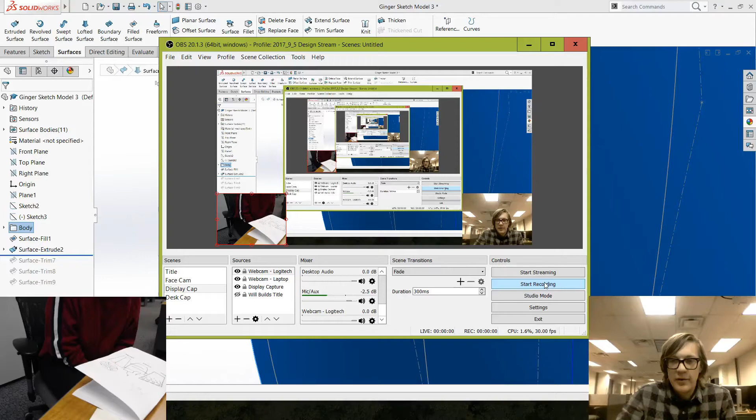So what we're doing is we have cuts, and we want to actually make them protrude from the surface of this thing instead.

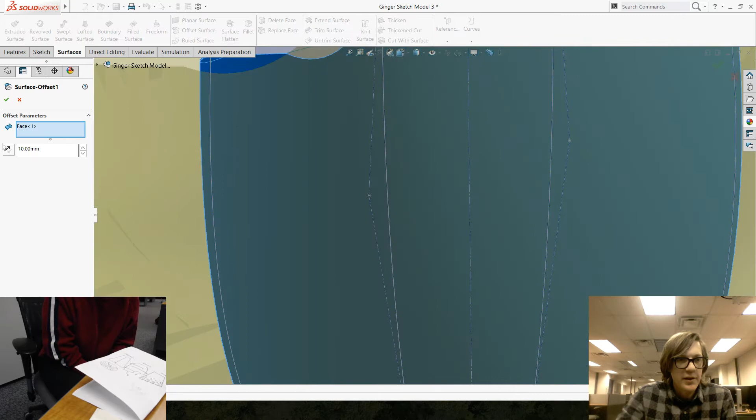One way that we can do that is before we do our trimming, I'm going to offset the surface like a millimeter. Nope, like maybe even 0.5 millimeters.

You do all of your trims, and then I'm going to use those same sketches, which are somewhere. Where are the sketches for these? They might be in the body or something. I don't know, oh wait, yeah I think they are, I think they popped up. Yeah, they're here.

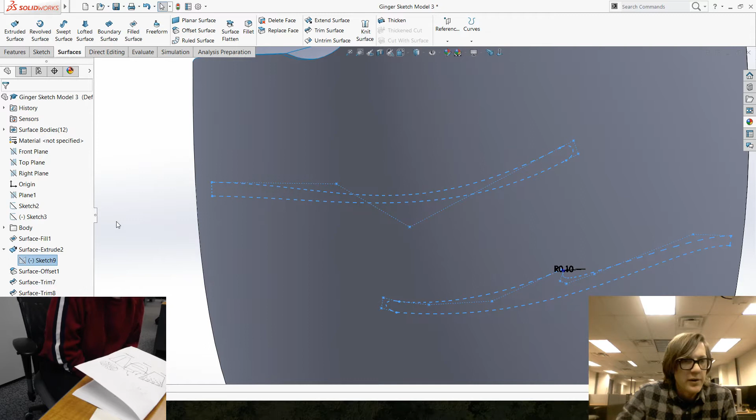I'm going to use these same sketches to trim this, and I'm going to get rid of these. So now I have a gap here, see?

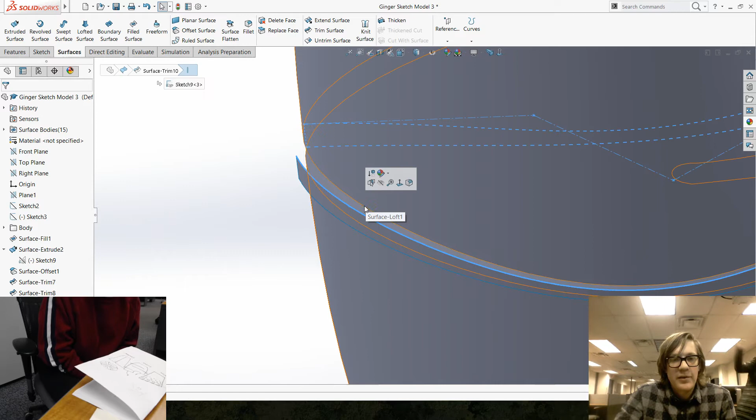I should be able to, well I guess you'll have to mirror this over. You should be able to then loft that profile to this profile. Yeah, and then you have an edge that you can just fillet, and it would look fine.

And actually these are small enough that you might not even have to fillet them at all. So that's one way to do that.

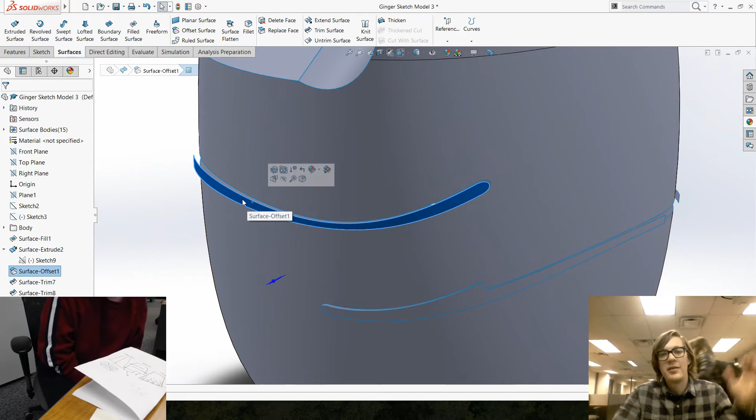The other thing you could do is, instead of trimming this surface, only offset it and trim these, and then thicken this surface back into your other one, and it would intersect. So you got two ways to do that.

To make this less rigid, probably I would just fillet it. The thing that's going to fail on your fillet is this corner right here.

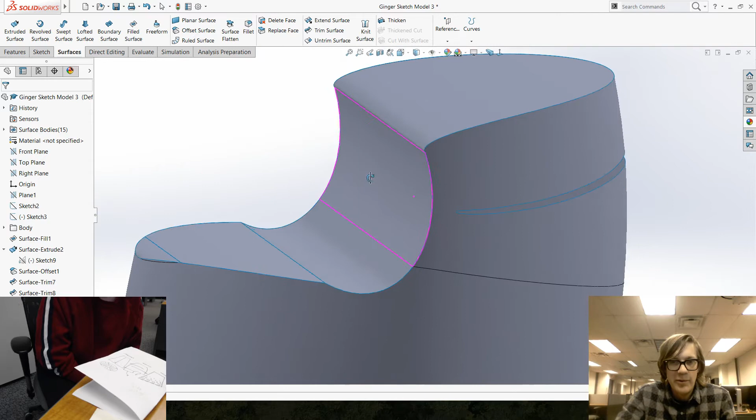So probably what I would do in your trim sketch from this dimension is just make this a sharp corner, and then fillet that. Gotcha, after you do the fillet around the outside. Yeah, I would just fillet those.

And then for, I guess the other one that I have a question on would be, I have questions for all, but I guess orange would be next.

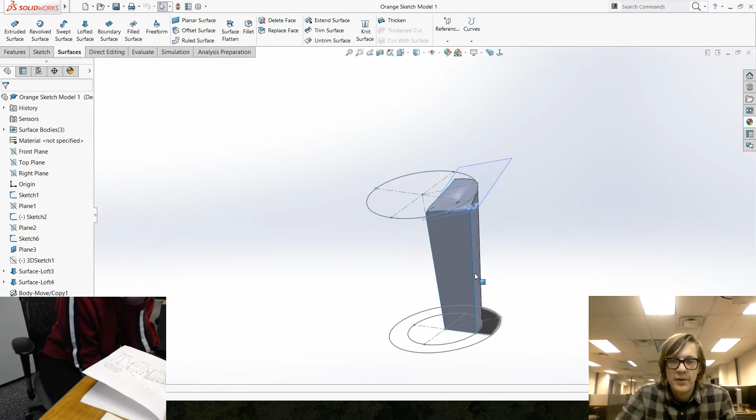So I have the segment, but what I'm not getting from that right now is I would like there to be kind of a curve here in between each one.

Yeah, and that's probably another fillet thing. I'll try it. So you have to knit these together first, and then your fillet should work.

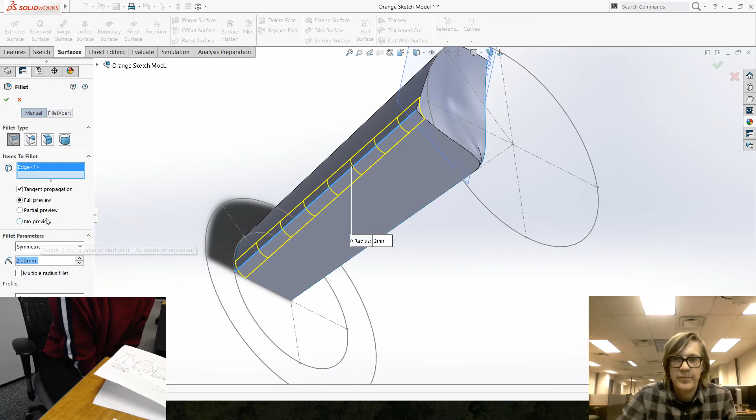Just right there. Yep. What if I wanted it to be kind of curved as well, right there? Oh I see, from the top view. I don't know how to describe that.

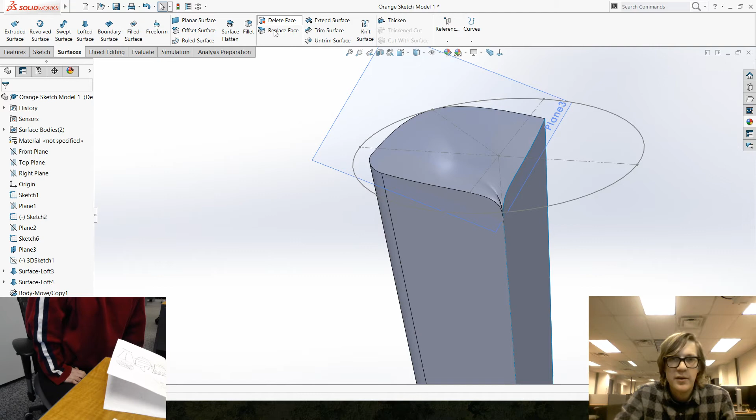You could also probably do that with a fillet on this edge. And it might have to be smaller, not 2, like 1. The thing that's going to break it is this crazy crunchy thing right there.

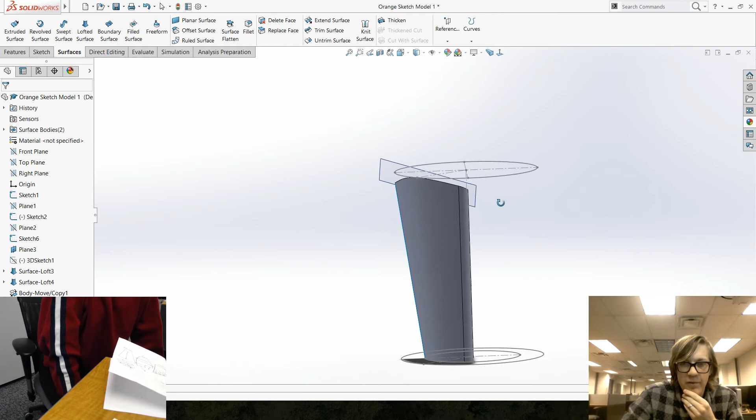The other way that you can maybe do that is from this view. I don't know if there's a plane here. There is a plane here. Let me sketch on this and do a...

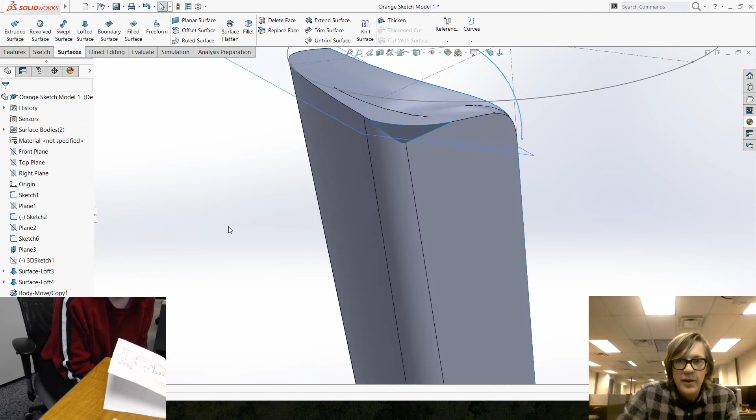...and just do a trim. Get rid of that. You could fill this back in and then do some more fillet magic.

Again, you're talking about kind of a cosmetic detail, so I think that's probably a good hack and a way to do it.

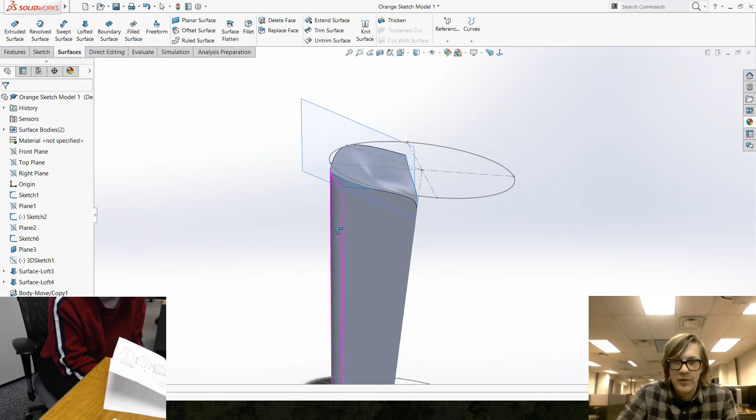Another thing you might be able to do, actually there are probably several other ways that you could get that curve. Another one would be to kind of rethink how you build this top so that this is less, and then before you do this fillet, you do the fillet on this edge, then you do this fillet.

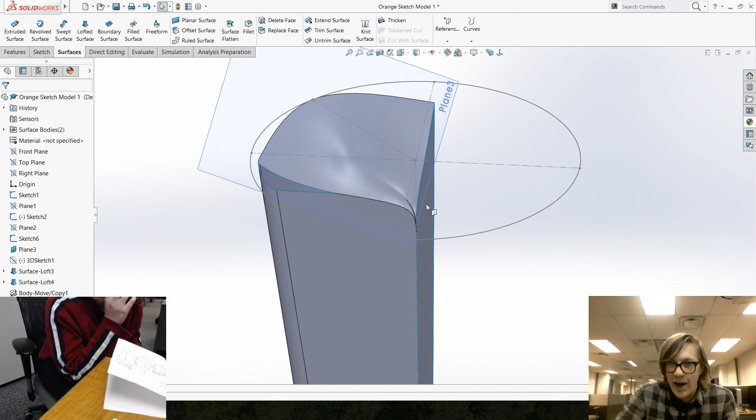This one would stay nice and crispy, sharp if you want it to be, and then actually hack this from a different angle. Okay. Does that kind of make sense?

Yeah, okay, yeah, that's all for now. Okay, yeah, yeah, thanks.

I wish I had more time to give to you guys for this stuff. That's okay, I can email.